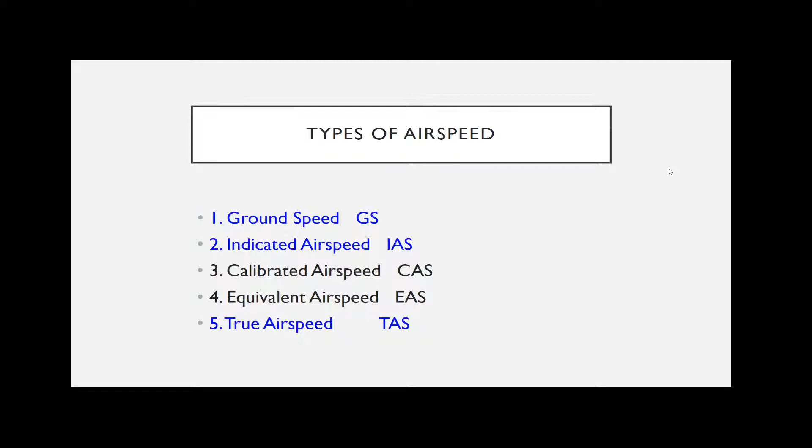Ground speed is the speed we are all familiar with. Speed equals distance over time, usually expressed in nautical miles per hour, called knots. We can use this practically for navigation and estimating time of arrival. If Mr. Gates's Bombardier can average 500 knots and the flight distance from New York to London is 3,015 nautical miles, we can tell him our flight time will be 6 hours and 2 minutes.

To understand indicated airspeed, we need to understand how it is measured using the pitot-static system. The altimeter and vertical speed indicator only need static pressure. As the static pressure changes, the altimeter and the vertical speed indicator record these changes.

For the speed indicator, we have a pitot tube pointing head-on at the airstream. We measure that pressure. We also have a static port which measures the static pressure. When the aircraft is still, the pitot pressure and the static pressure are the same and the indicated airspeed is 0. The faster we go, the more air molecules ram themselves into the pitot tube—we call that ram pressure. We measure the difference between the pitot pressure and the static pressure at different speeds and assign a speed value in knots to that pressure difference.

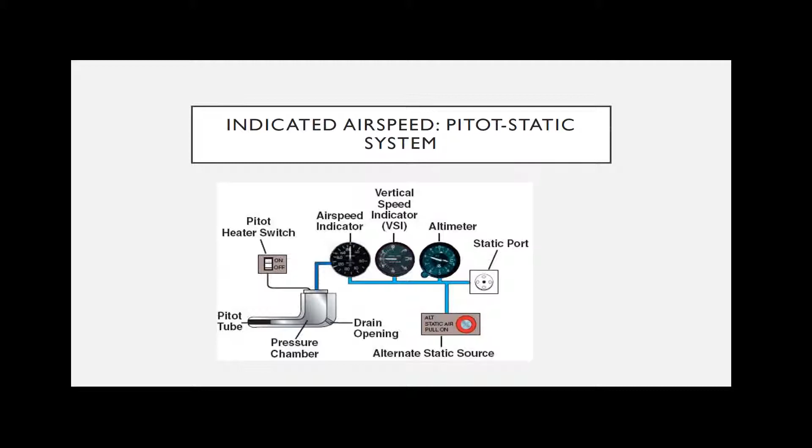So here we are calibrating our indicated airspeed gauge. We are using international standard atmospheric conditions—that is, we're at sea level, there's no wind, the temperature is 15 degrees C, and humidity is 0%.

Our Tesla has an ultra-accurate speedometer measuring our speed in knots. We are matching our ground speed to exactly equal our indicated airspeed under these conditions. What we are really doing is matching our ground speed to the pressure difference reading in our pitot-static system. We call this indicated airspeed, but we can think of it as pressure or force speed. Under these conditions, indicated airspeed, ground speed, and true airspeed are all the same.

We now take our Tesla to 6,000 feet with our calibrated pressure speed device. We now see that when our pressure speed measures 100 knots, our Tesla's ground speed is 113 knots. Because there is no wind, this is also our true airspeed.

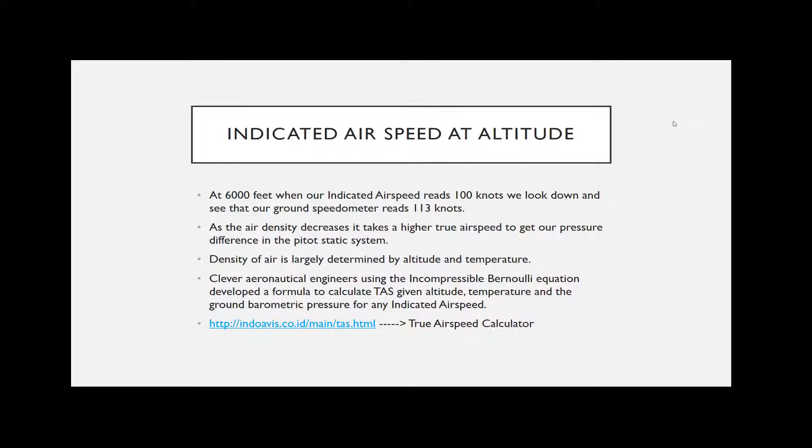It turns out that the less dense the air gets, the faster we have to go to generate a pressure speed of 100 knots. The density of air depends mainly on altitude, but also on temperature and very slightly on humidity. So clever aeronautical engineers, using the incompressible Bernoulli equation, devised a way to calculate true airspeed at any given air density. To work out air density, you need to input altitude and temperature. You then input the indicated airspeed, and true airspeed is calculated.

Why on earth did we invent such a weird way of measuring airspeed? Well, it turns out that indicated airspeed, or pressure speed, is directly related to the forces on the wings for takeoff, stalling, and many other speeds that we need to fly an aircraft.

The good news is that all our indicated V-speeds are the same no matter what temperature or altitude we are at. Imagine if our airspeed gauge indicated true airspeed—we would need tables for each altitude and temperature to know our VR speed and all our other V-speeds. Our VR speed and stall speeds, when we use indicated airspeed, are always the same.

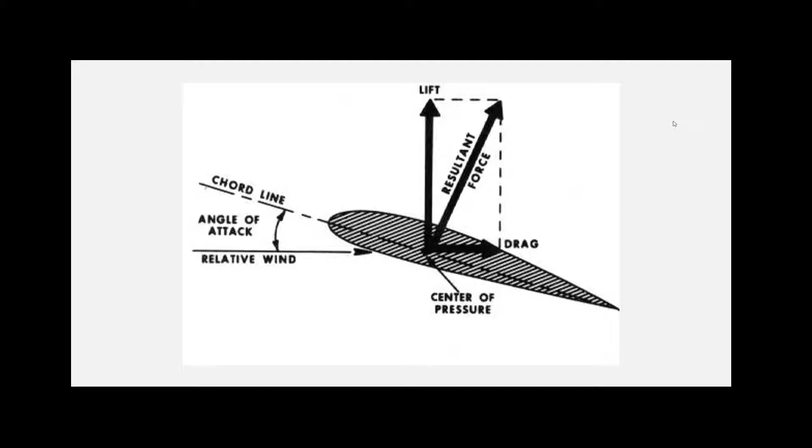Let's have a look at some practical implications in our twin-engined Beechcraft Baron. The red line on the speed indicator represents VMC, the minimum speed to make our plane controllable on one engine. The blue line, VYSE speed, is our best climbing speed if one engine fails. So we usually rotate at red line plus 5 knots, about 90 knots, and then wait for 101 knots, the blue speed, before we pull back more for a steeper climb.

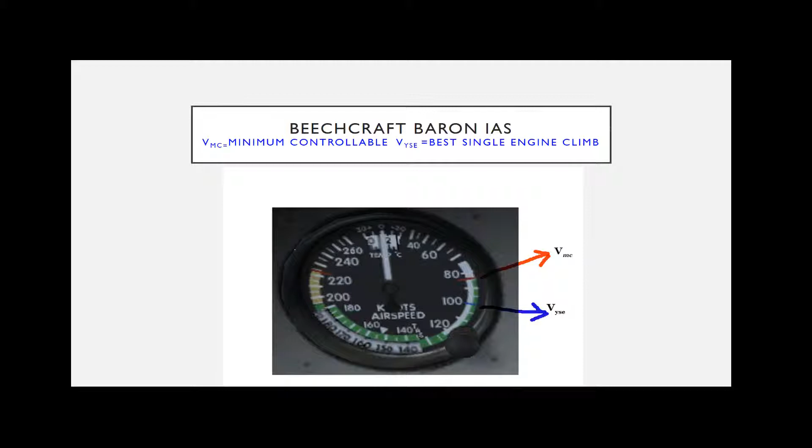Let's have a look at these implications if we want to take off from different airports. JFK is virtually at sea level, so our VMC is 84 knots and our true airspeed is also 84 knots. Our VYSE is 101 knots and our true airspeed is also 101 knots.

At Jeffco in Colorado, the altitude is 5,700 feet. Now when our speed indicator says 84 knots, our true airspeed is 93 knots. The true airspeed at blue line speed is now 112 knots.

At El Alto International in Bolivia, at an altitude of over 13,000 feet, our true airspeeds jump to 108 and 130 knots respectively.

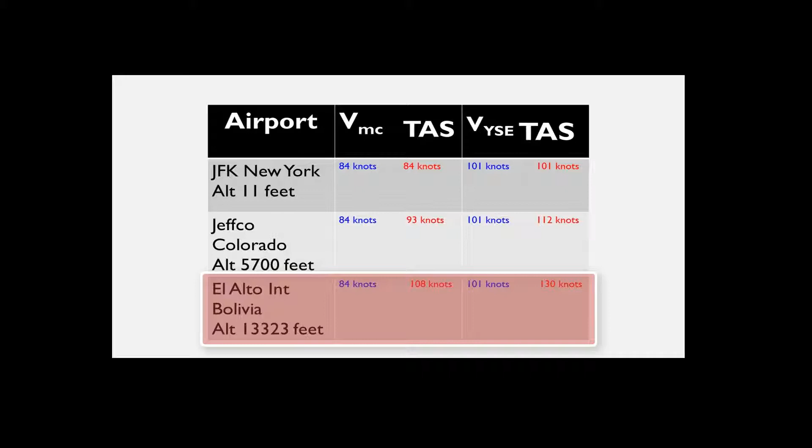True airspeed is important for navigation. It is expressed as TAS or KTAS for knots. It's the speed at which air is moving over our wings. True airspeed will be ground speed minus tailwind, or ground speed plus headwind.

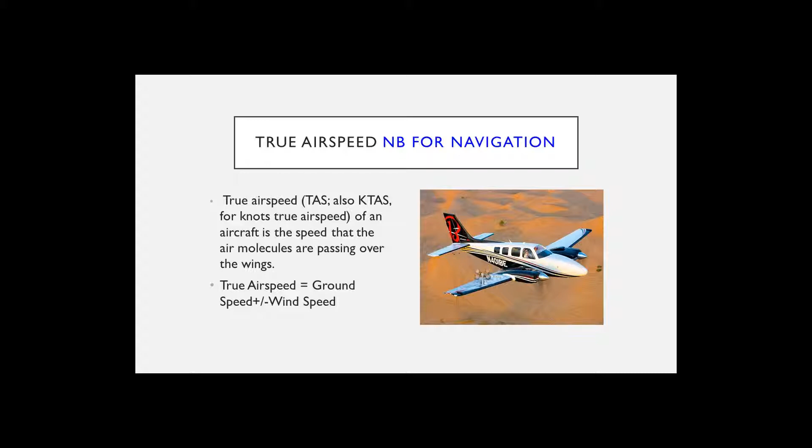Calibrated airspeed is indicated airspeed corrected for pressure error measurements. Pressure error measurements are caused by instrument error and position error. It is impossible to put the pitot tube in a position that will be accurate under all conditions. Also, the static pressure should be far field, that is, measured away from the aircraft. This also can't be done.

In fast climbing aircraft, there is a pressure lag error. Thus, calibrated airspeed is airspeed calculated from indicated airspeed. Below 10,000 feet and 200 knots, the difference between IAS and CAS is negligible.

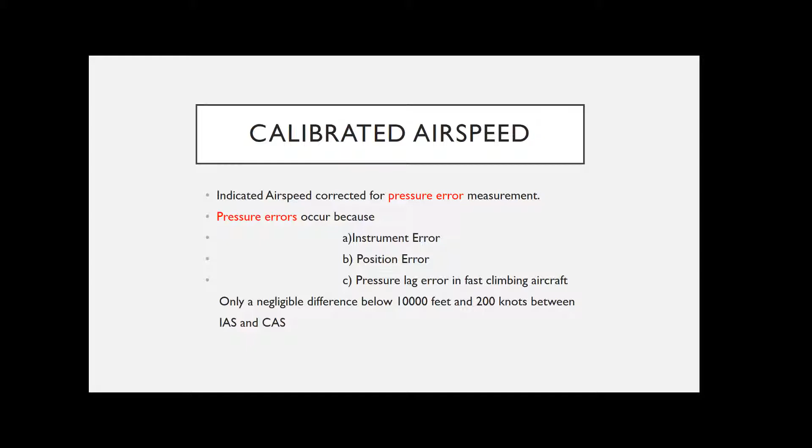Why do we need calibrated airspeed? Engineers need it. It is more accurate than IAS as an intermediate step to calculate true airspeed. Accurate speeds are important for aircraft control and design. By law, IAS gauges cannot differ from calibrated airspeed by more than 3% or 5 knots, whichever is greater. In most situations, it will be less than that, so 1 or 2 knots in our Cessna at 100 knots is acceptable.

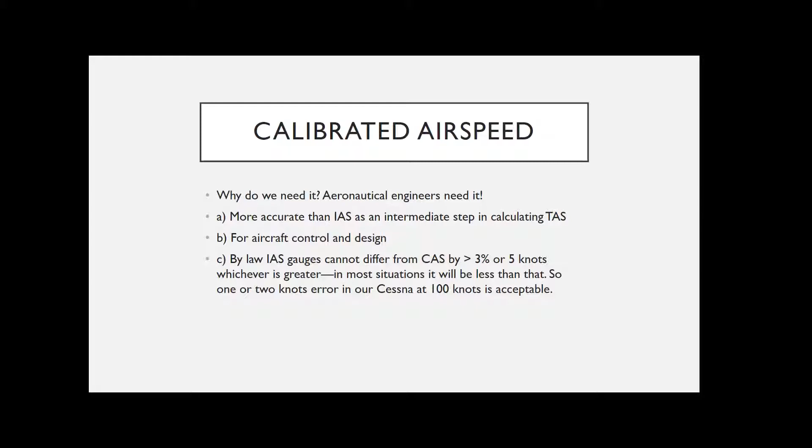Equivalent airspeed. By the 1930s, aircraft were flying high and fast. Calibrated airspeed was not accurate at high speeds greater than 200 knots and altitudes greater than 20,000 feet. Because it was useful for predicting aircraft handling, aerodynamic loads, and stalling, it was important to find something more accurate.

At high speeds and altitudes, air no longer behaves as incompressible, and Bernoulli's compressible equation has to be used. At high altitudes, a lower pressure speed will correspond to true airspeed. This amounted to a density correction.

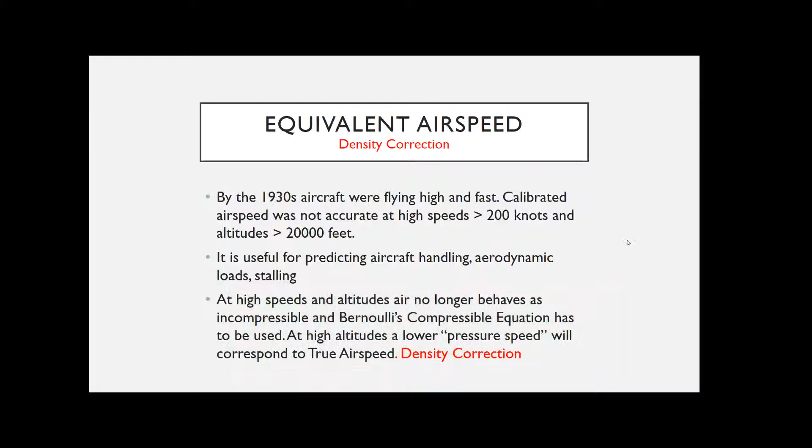Here is a graph showing these speeds at different altitudes. You can see that with altitude, true airspeed increases with respect to both EAS and CAS at approximately 2% per 1,000 feet of altitude. At high altitude, you can see that the EAS is much lower than the CAS, and this is the speed that engineers need to calculate true airspeed, to determine stall speeds, and predict other aerodynamic forces.

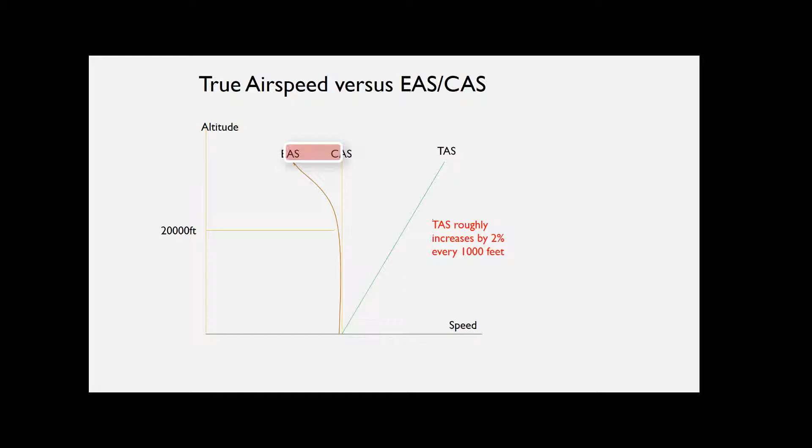Here is a summary of what we have been talking about. Calibrated airspeed is indicated airspeed corrected for pressure error correction. Remember, we said this was done due to instrument error, position error, and lag pressure. Equivalent airspeed is used at higher altitudes and speeds to correct for the fact that air now behaves as a compressible gas. True airspeed can then be derived from this equivalent airspeed by correcting for density at that particular altitude. This can all be easily remembered by using the mnemonic ICED TEA, pretty cool drink.